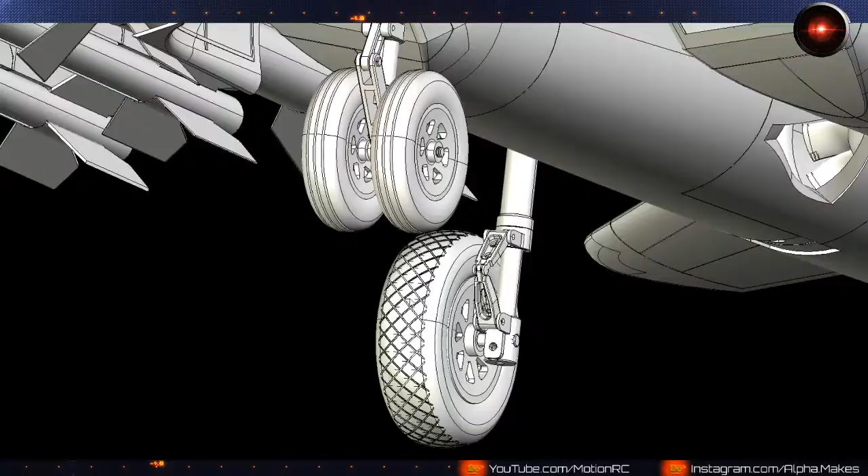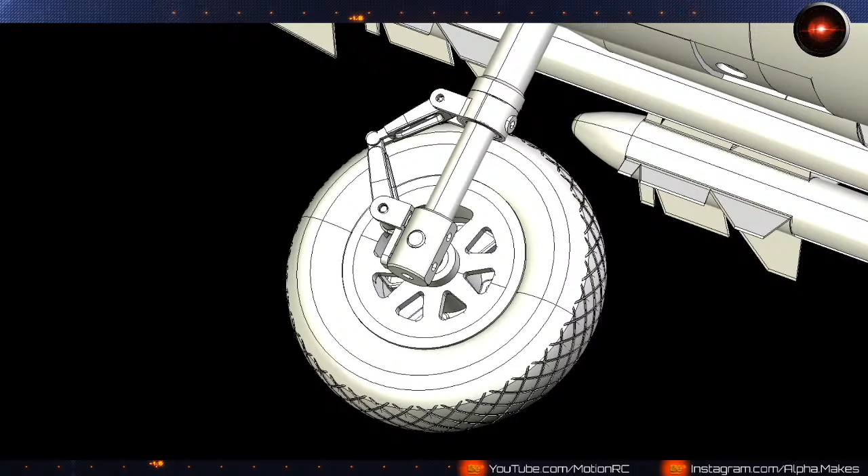So at the time, we sort of quick designed live a little component that would go onto the mains, and in this case we were talking about that MiG-29. So let me go to the MiG-29 and we'll zoom in here. And we free drew a device that's designed to clamp right onto the stock strut of the MiG-29. So we looked at clearance, making sure that this would be able to fit inside the aircraft after the undercarriage was retracted, and all of those important considerations. Trying to locate the device on the stock strut without needing to change the strut or do a lot of modification. So that's what we started out with, and I'll show you what we ended up with as of today.

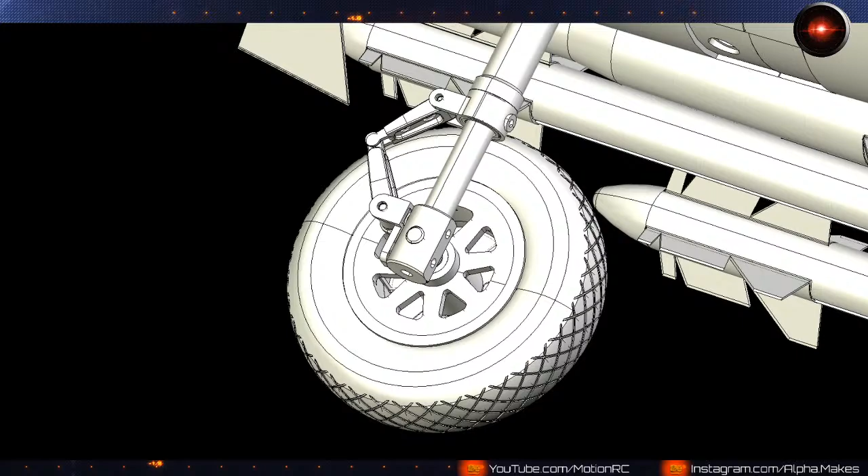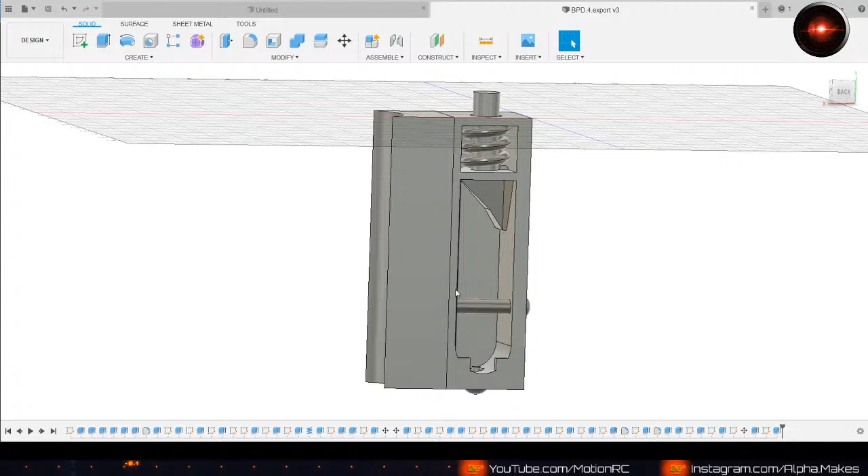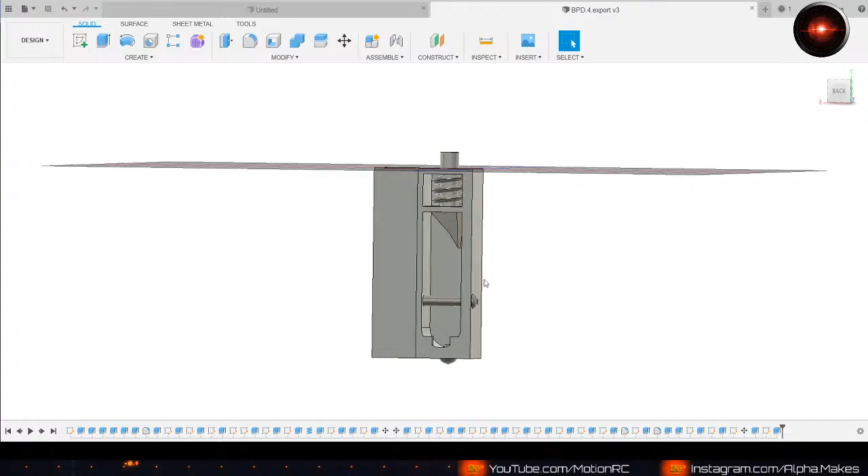Let me switch screens here. Okay, so here is now the final version. Final version is a 3D printed device. It's designed to print very simply. Got a couple little parts in it, a spring and 2 screws. And what this device does is you see this recess here that allows it to clamp over the stock strut and then secure with glue, or even we can bring a screw through and utilize the existing screws on that axle clamp. But the idea, guys, here is that we can insert into this area a pill.

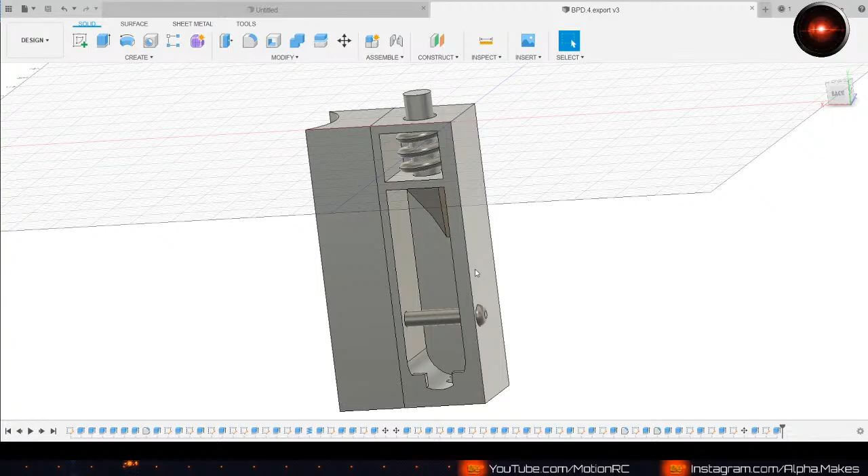It sounds funny, but we just use aspirin pills, gel caps, I should say, where inside it's a powder and the outside it's whatever type of material they use that'll disappear once you swallow it. So again, word of warning, I'm not recommending anyone go out and buy any specific medication, and read the label and all that sort of stuff.

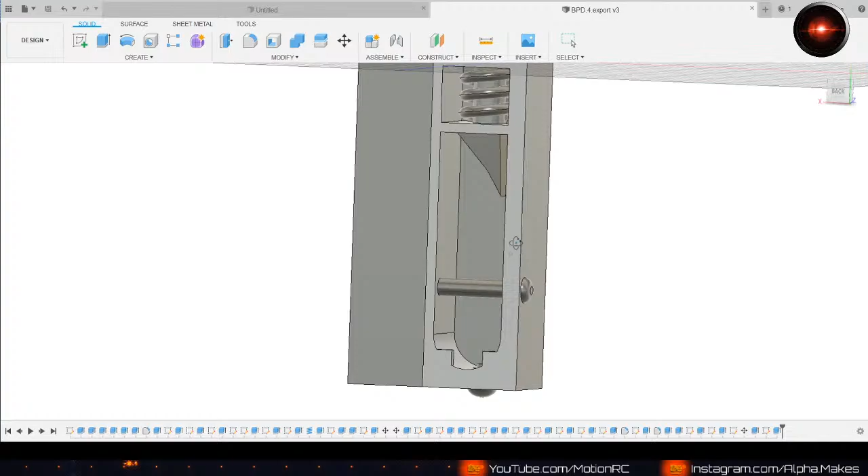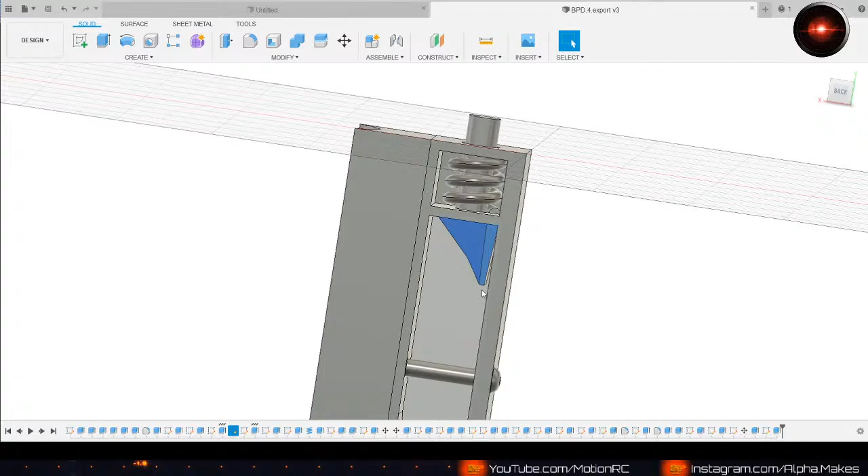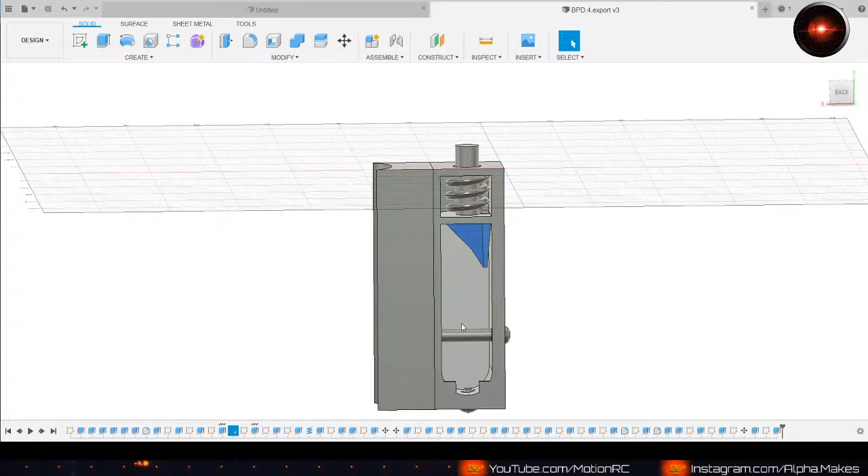But the reason why we're looking for a sort of a dry capsule is because this system is intended where you can very simply screw this onto your strut, lift what I'm calling the wedge, this guy here, push this upwards where it's in its completely sprung position, and a standard 500 milligram capsule is going to allow you to insert the capsule into this cavity here. And then when you release the wedge, it's going to sit gently on that capsule. It's not going to break it just yet, but it is sort of spring loaded. And this takes us to the firing pin, this area we see here in blue.

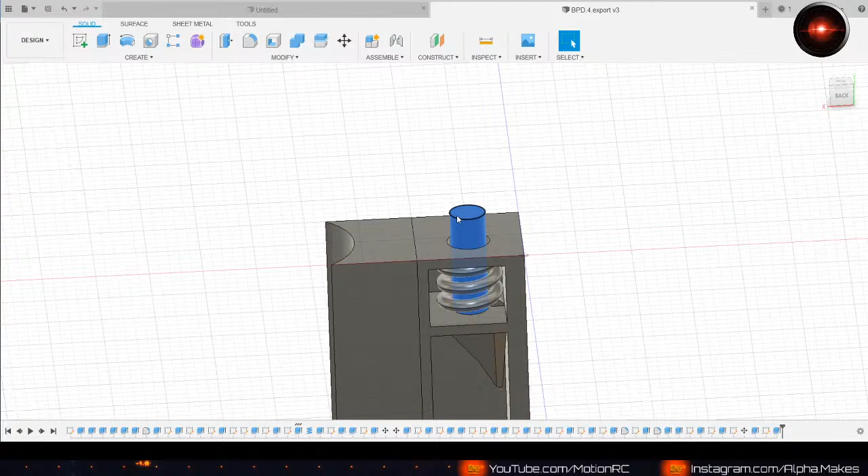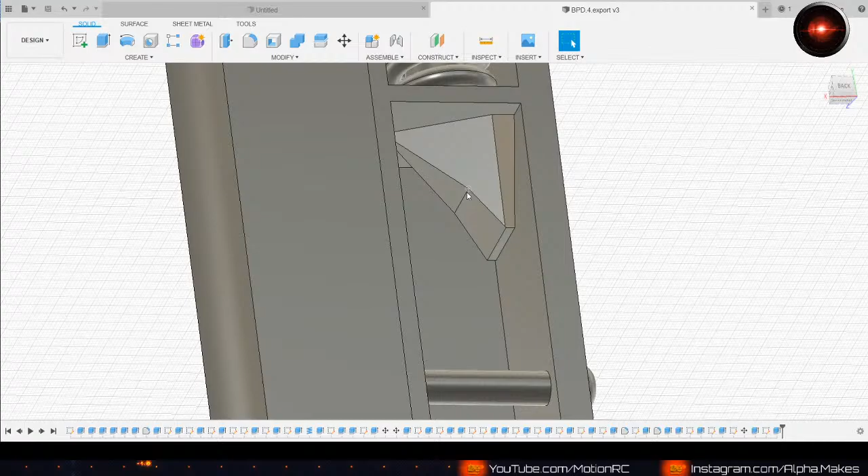And that firing pin is actuated by a separate piece that is secured to the main strut, to the part that does not compress, such that when the axle, so this part we're looking at here is connected to the axle, when that is compressed relative to the main strut, that hammer touches this pin, the pin extends down into the cavity where the capsule is sitting, and this wedge shape, initially it was a flat face, but that wasn't really enough to both break and disperse the capsule.

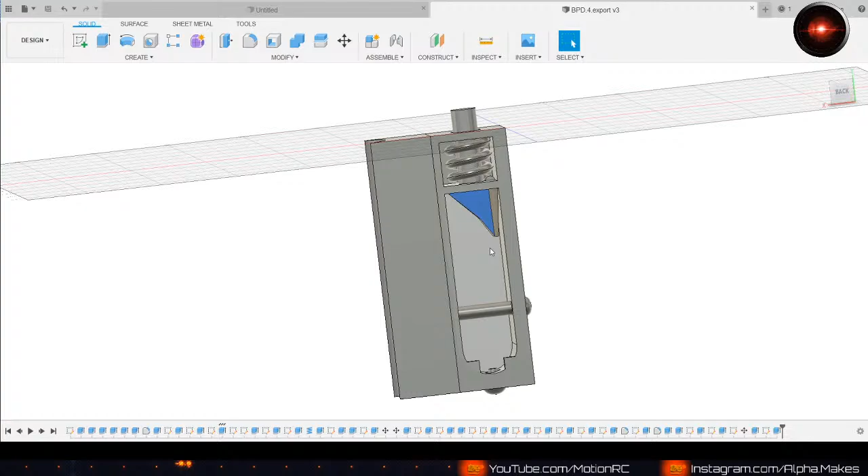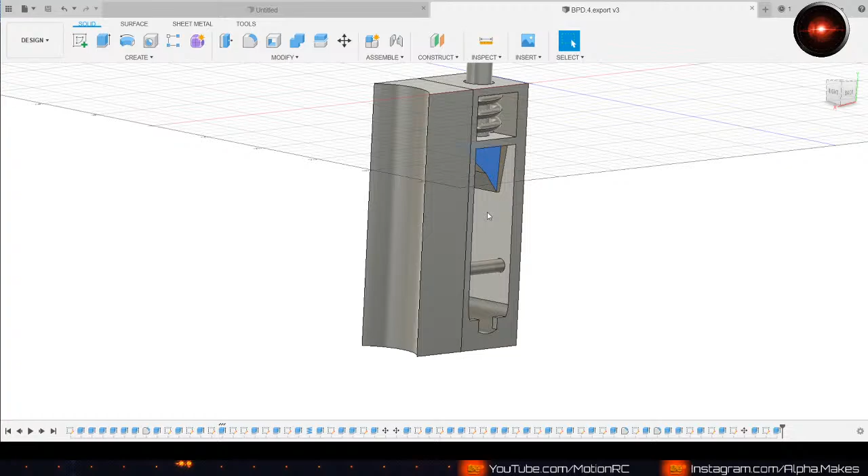But this wedge design is sort of perfect. It splits the capsule as it's moving downwards, and as it continues to move downwards, it actually basically bursts the capsule. And this entire face on the side of it is open. The reason why I use this screw here is this allows you to easily slot one in, sort of analogous to loading a shotgun shell in a shotgun. You enter at an angle and slide it right in.

And the advantage of that design is because the entire face is open, when the capsule bursts, all of that powder goes directly outwards. And as you can see, relative to the main strut line, it's designed to actually burst into the wheel. So it's designed to burst into the airstream, as it were, of that spinning wheel at the moment that it hits the runway.

The finesse in all this, as far as setup, which is why 3D printing is so convenient in being able to iterate these designs and test prototypes very quickly, is you want to make sure that it's set up such that you have enough force to compress the capsule and burst it outwards at a typical landing speed and a typical expectation of compression on the strut, but not enough force or stroke where you're going to burst the capsule upon takeoff.

So we're assuming you're taking off nice and smoothly on pavement, so that the only time that strut is really going to take a hard hit is the very first time you land. So you land, you get that nice puff of smoke or dust as you're touching down, taxi back, reload another capsule, and do it again.

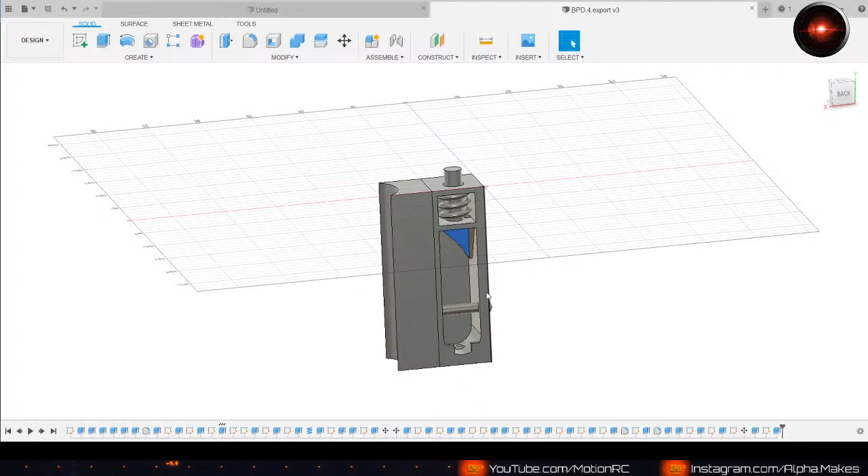The elegance of the design, which is one of the things we talked about when we first created this, was we wanted to find a way to make something that was easy to install and was cheap and light, easy to create, easy for people to go out and replicate themselves, and didn't require any electronics, any pneumatic lines, none of that sort of complexity. So that's what this ended up being.

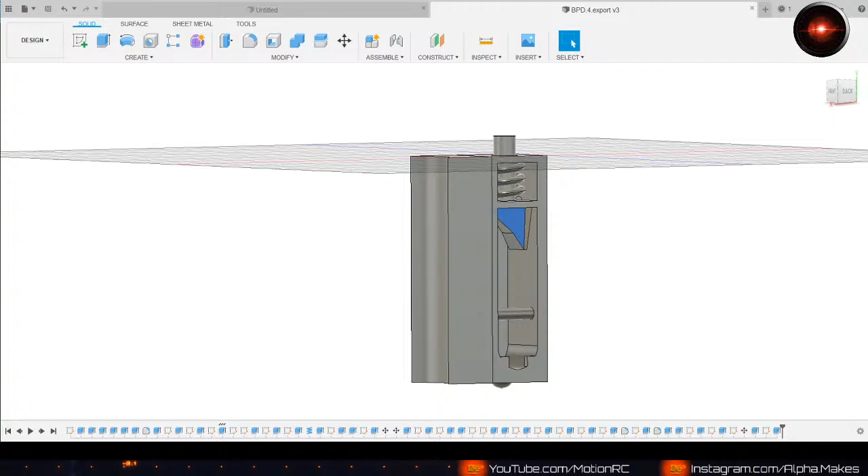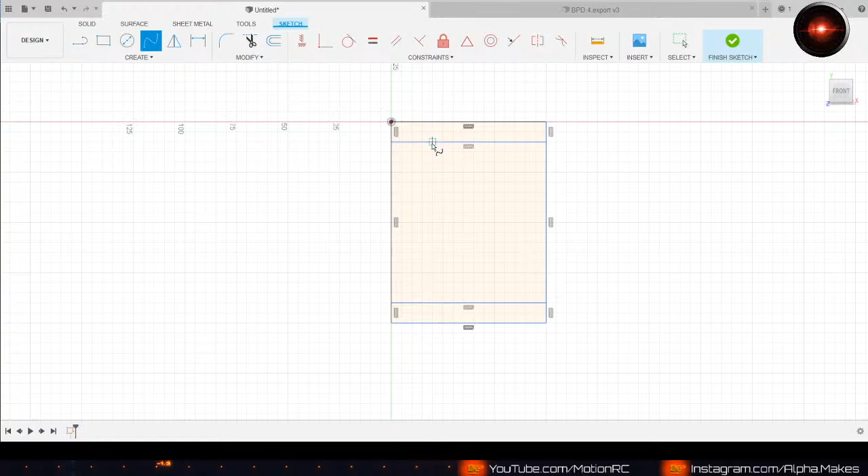Come in. We actually did this in one of the very first episodes, as I recall. But we had a request from one of the subscribers who asked if we could make a new video now that we're on YouTube. Just a very quick tutorial on how to do something like a NACA duct. So I'll show you how to do that very simply.

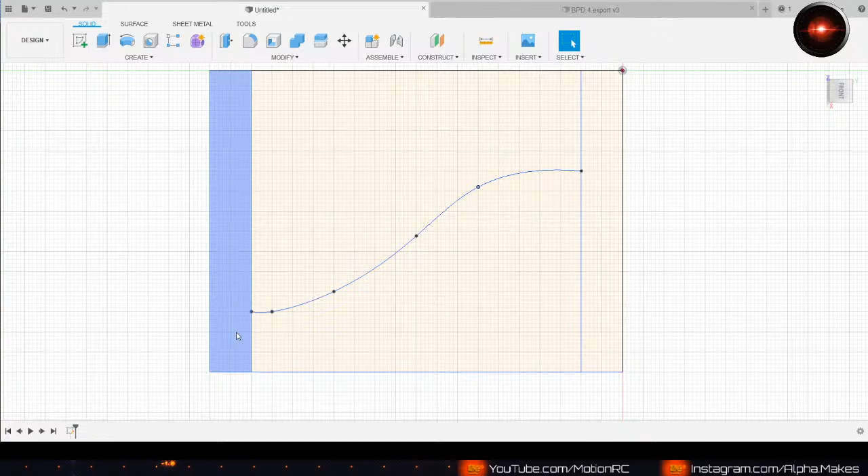For those of you not familiar, a NACA duct sort of needs no introduction. But a NACA duct is an aerodynamic duct designed by NACA, not NASA. Among other things, it's essentially intended to optimize air intake without breaking up the boundary layer. So it's essentially a low drag intake.

It's not efficient to the point where it's sufficient to fly an airplane. There have actually been real life tests of aircraft that use NACA inlets in lieu of traditional intakes, and they didn't really work out. But we see this shape very frequently for auxiliary inlets on real aircraft, and also probably most notably on F1 cars, race cars, and whatnot.

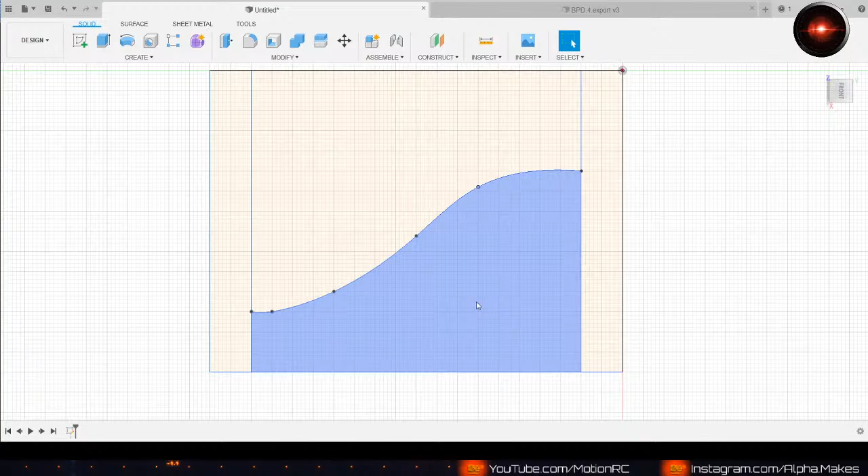So it's a very simple shape. However, it's a rather exacting shape. So I'm not going to delve too deeply into how to do that. But essentially, we have a curve, and then a taper, and then a longer throat. And in fact, while we're at it, we'll do something a bit more to scale.

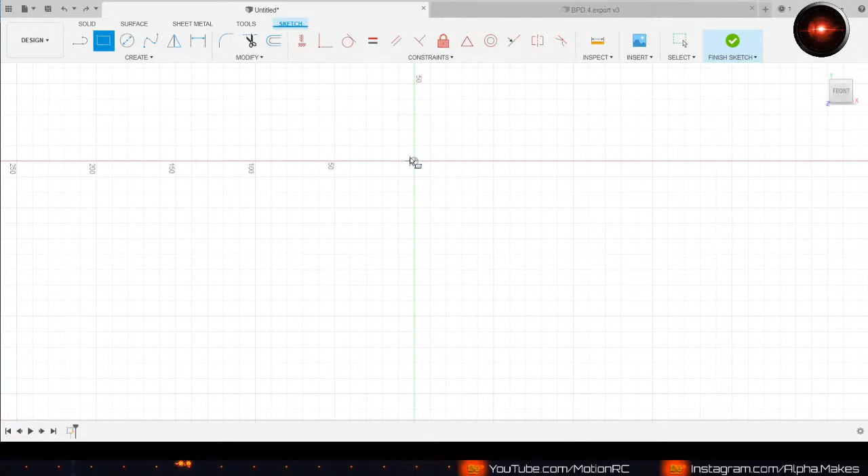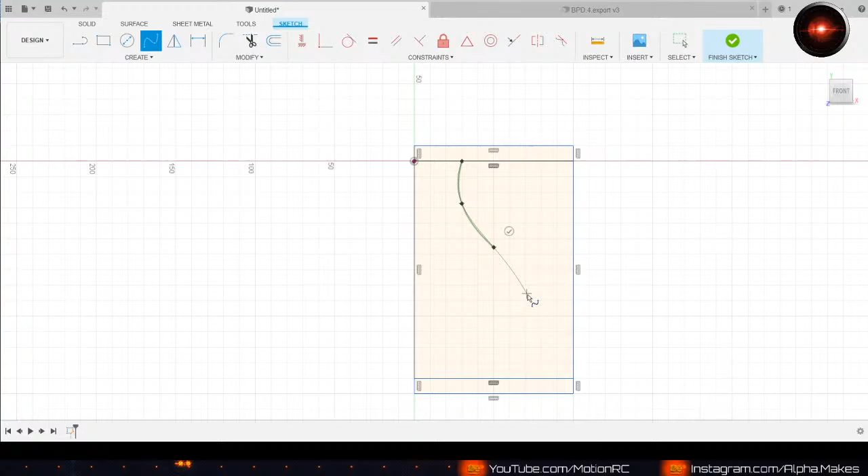Using Fusion 360, this is something that very simply we can add on at any given time. We can import a canvas, which is their fancy word for an image, and you can actually trace directly over a real NACA inlet that you find online to get a better approximation of its shape.

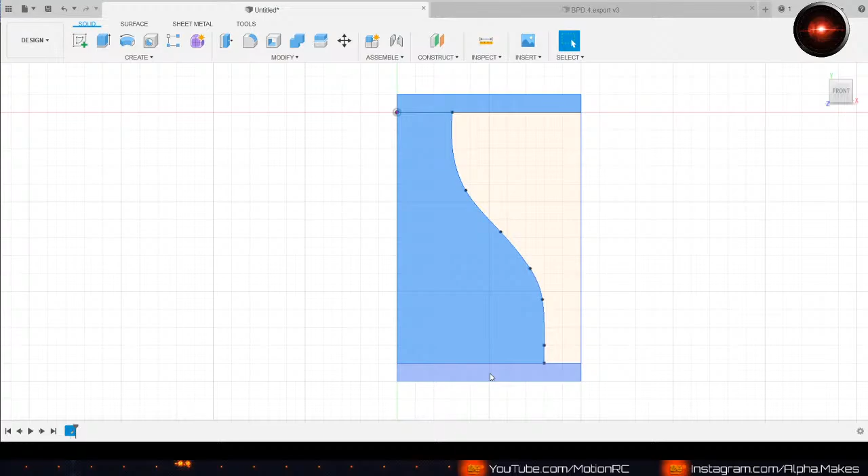On the one hand, in real life, these need to be very exacting proportions. The structures are designed as they are for a very specific reason. In RC, it helps to be efficient, but it isn't absolutely imperative, given that air molecules don't size down. So I create a half of that shape. Pretty simple. I'm going to do something else as well.

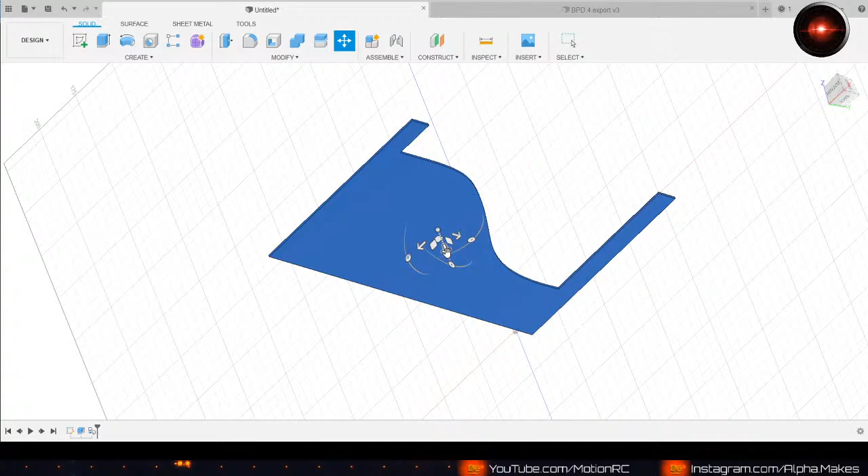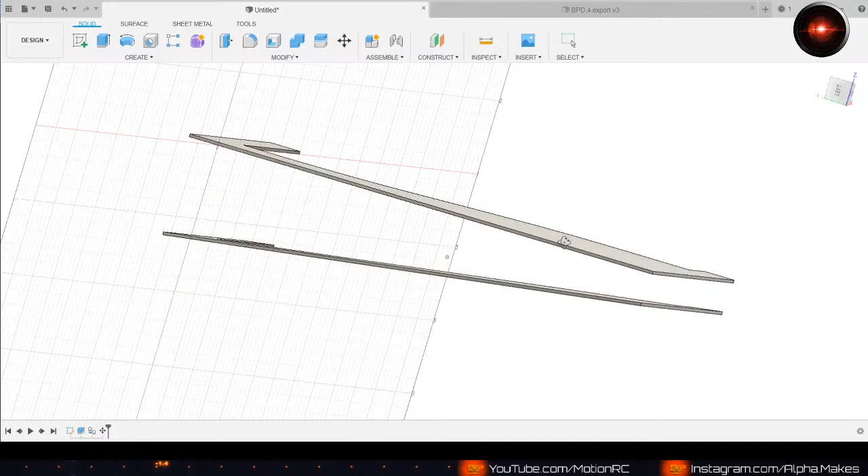I'm going to press M. I'm going to create a copy of that shape. Well, I'll show you two different ways to do it. I'll create a copy of that shape, bring that down a bit, and rotate it like so, such that when viewed from the side, there's a taper there. And we can then very quickly click the two inner surfaces and loft those together.

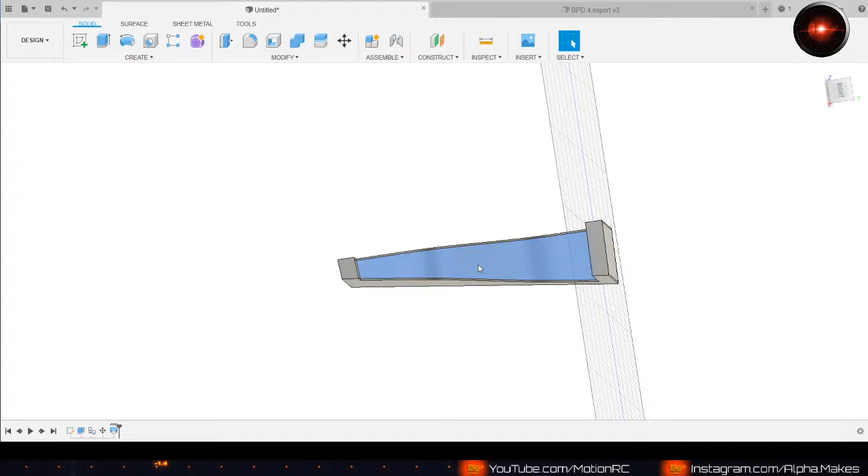Once that gives us a loft, to help you visualize, this surface is the outside. This would be the outside of the fuselage. And this surface here in blue, this is as we're coming into the fuselage or whatever housing you might have. Okay, so there's a slope. Now once we're satisfied with that overall shape, we'll go to mirror. We'll select the body. We'll select the mirror plane. And now we have that shape.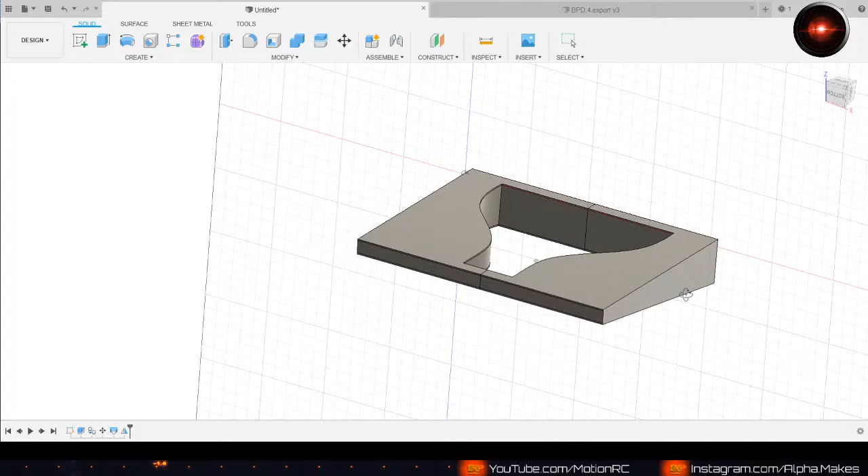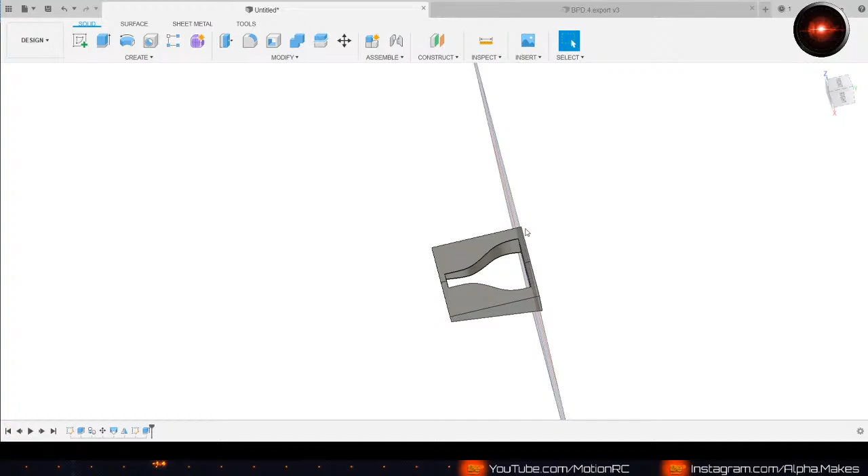Now of course, this is going to go back, so we extrude that back. We're thinking in terms of how do we make something that's easy to be 3D printed. So I'd probably leave it just like this. Probably print it flat on the bed, like so. And then once it's printed out, we would need to put a sheet underneath this bottom piece. So let me show you what that's going to look like.

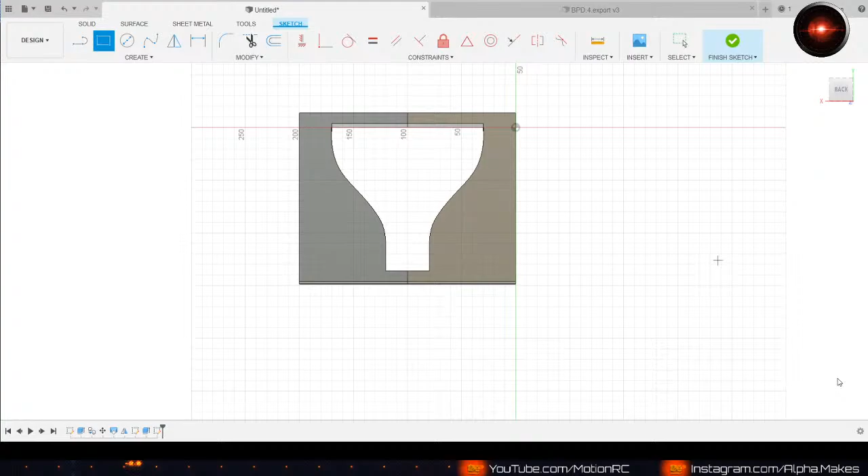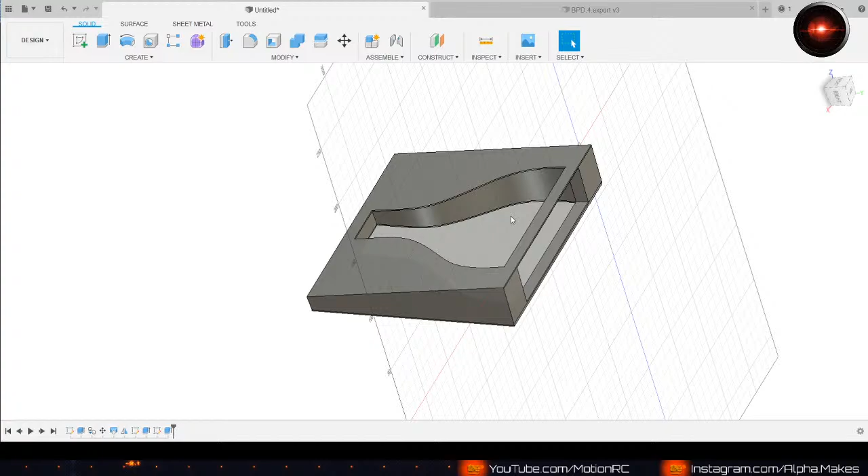We'll go corner to corner. And extrude that out again. So pretty simple, pretty straightforward. There's your NACA duct. To install this, you would cut a hole in whatever you're installing it in, and the airflow comes in here, and then enters into your plenum or your ducting or whatever else you've intended for it to go into.

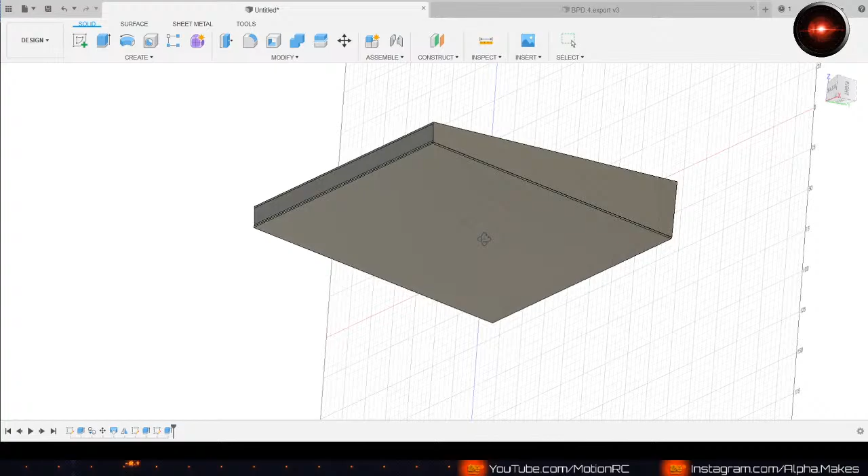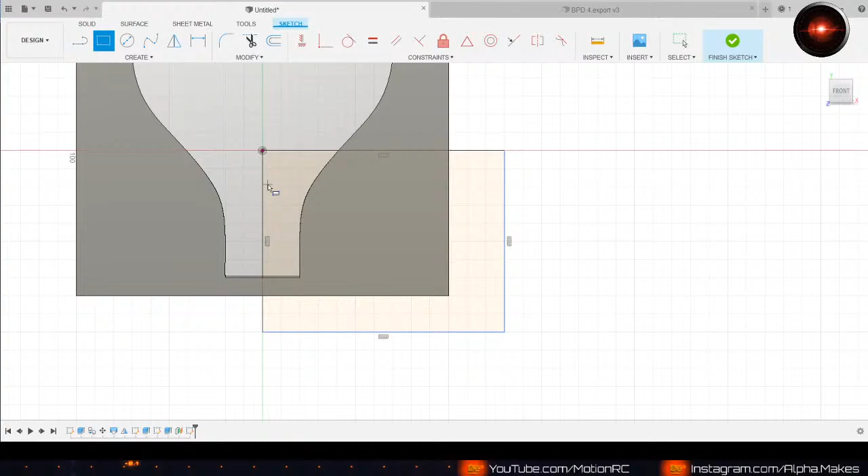If we wanted to make something that we could maybe screw in, which is nice, we can simply create an offset plane. We're going to bring that down just a bit. And now we're going to draw onto this plane. Just give you a quick example here. And we'll loosely trace those shapes.

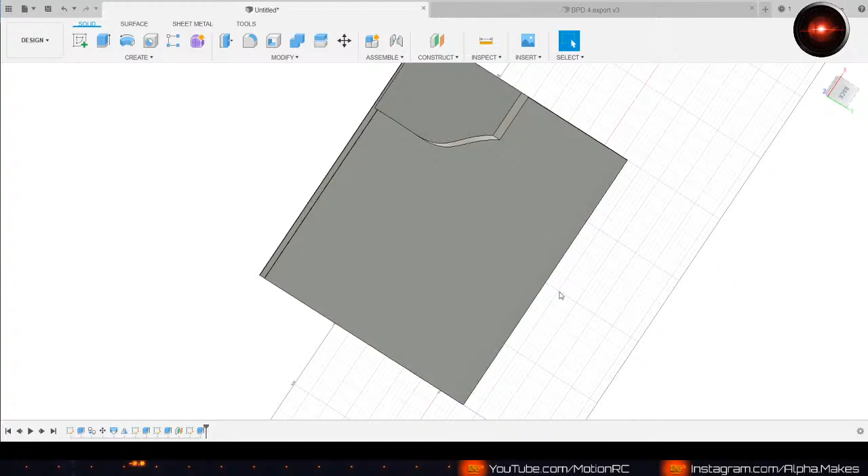And extrude that down. Click OK. Now what this does is, if we were to print this, it gives us a flat spot where we can then either print a hole for a screw or a locator pin.

Hey, Wes. Yeah, Air Guardian, I can hear you. I can hear you in Discord if and only if I turn up the YouTube volume, which basically means the way I have it set up, which I'll have to change and troubleshoot later, the Discord mic input is actually in YouTube only. So the good news is if I turn the YouTube volume on, I can hear all of us together. And YouTube, in fact, is recording all of our voices. The downside is if I turn YouTube volume up, obviously now I can hear myself twice.

Okay, hey Wes, nice to see you. We're just getting a test recorded, just a test here, but with our setup we don't hear ourselves.

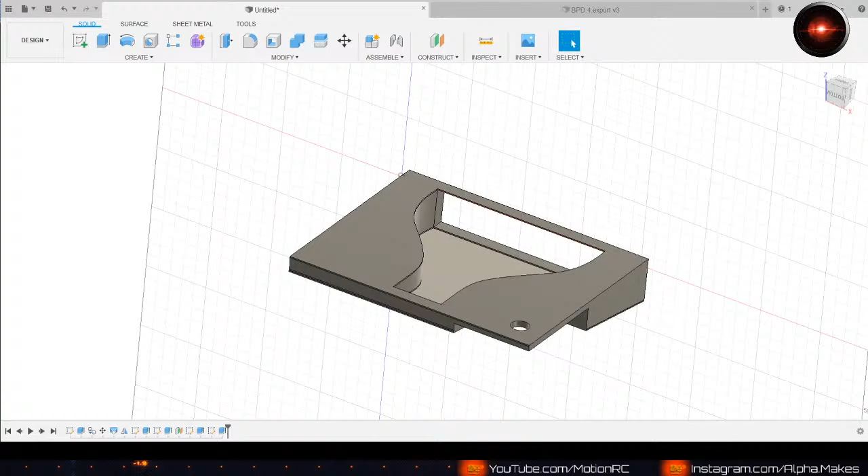So that, guys, is a very simple way to create a NACA inlet. Okay.

Yeah, there's a delay. There's a delay, Air Guardian.

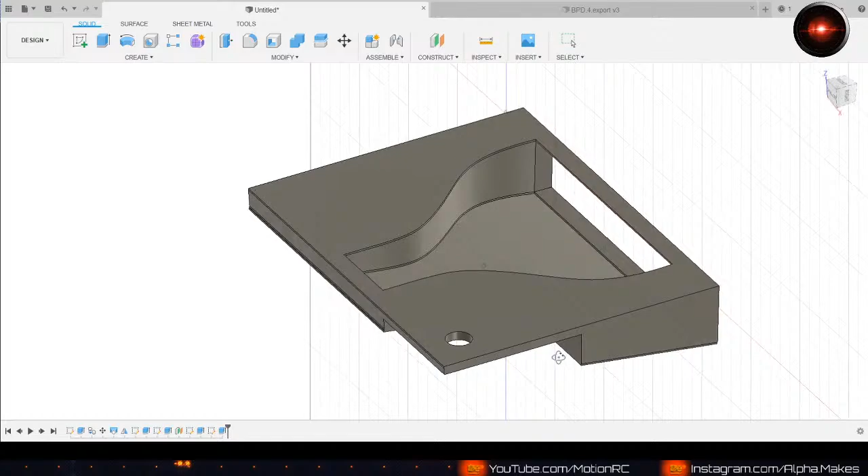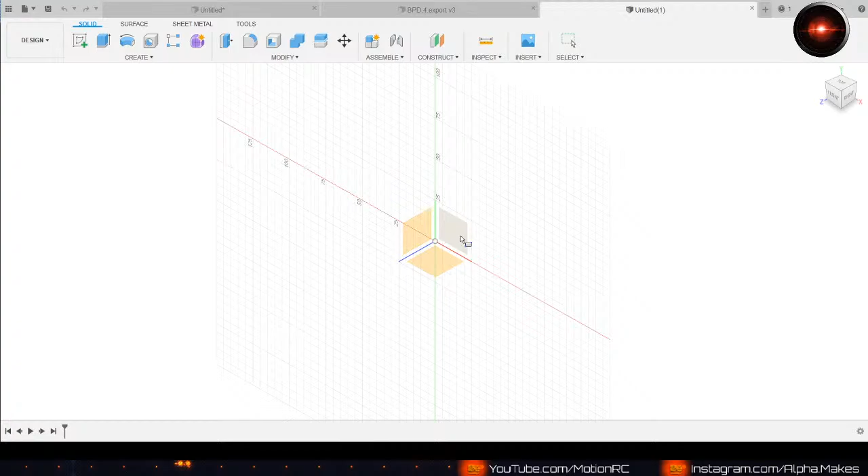Now, so that's one way to do it. The one disadvantage of that simple way is the slope. Slope is a straight line. On a real NACA, it actually has a curve to it. So I'll show you how to very quickly, simply make one of those. We'll actually just jump from the top. These are so simple to draw, we can just start again from the beginning.

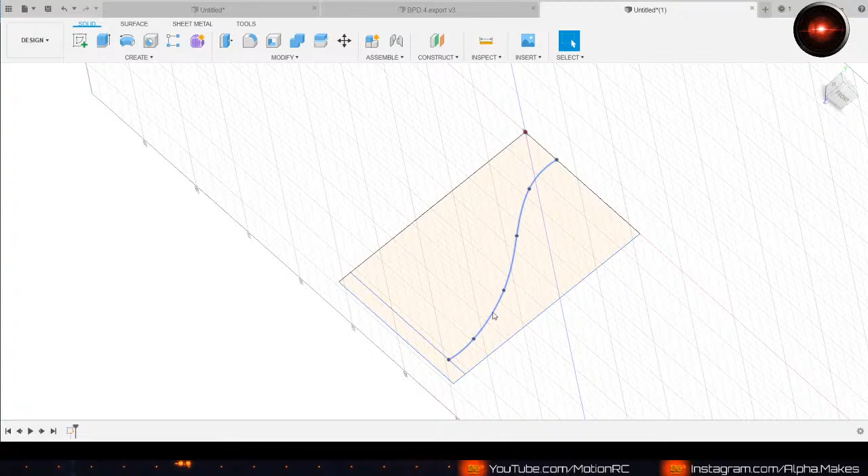So clicking the spline, creating my shape, making a couple of adjustments here. Okay, so this is our general shape for the outer face of the NACA.

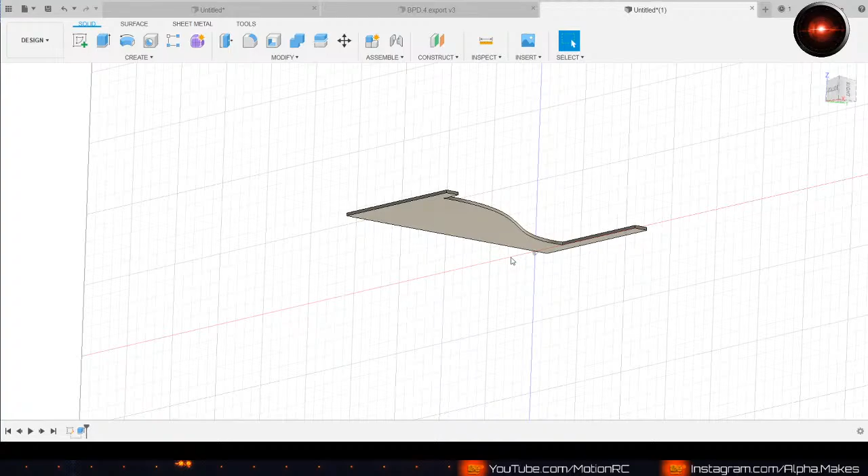Now, rather than duplicating this and setting one at an angle, we're just going to, how do we make slot car track parts? Easy. Easy, Wes.

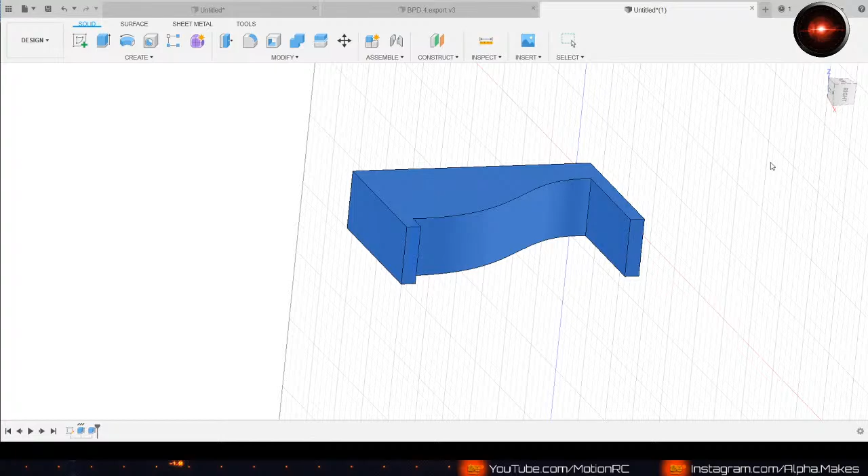So let's go ahead and split that. And while we're at it, we select our body. This is the body we want to mirror. We select our plane. This is the plane. We click OK, and there we go. Now, to do that slope, we locate the side. Click on the side. Press R.

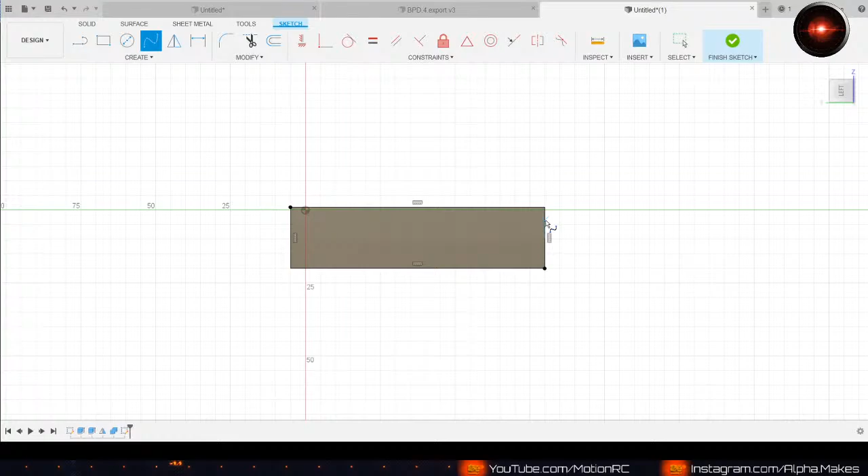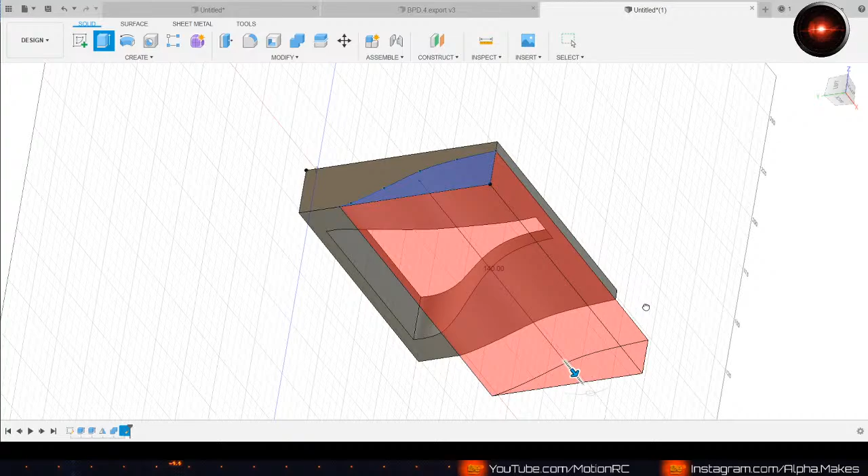And now we'll redraw that slope. Now this is where you're going to look at your reference drawings. And the slope is also a very important sort of element. I'm going to eyeball this. It's going to look something like that. We're going to take this shape. And then pull that across.

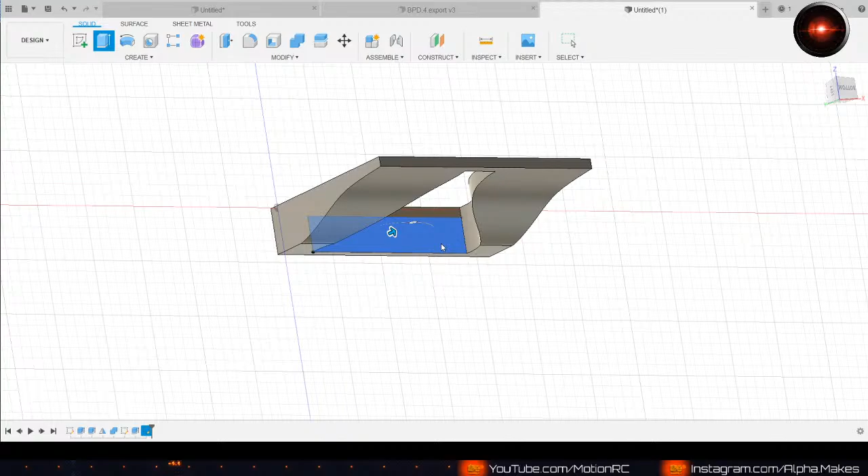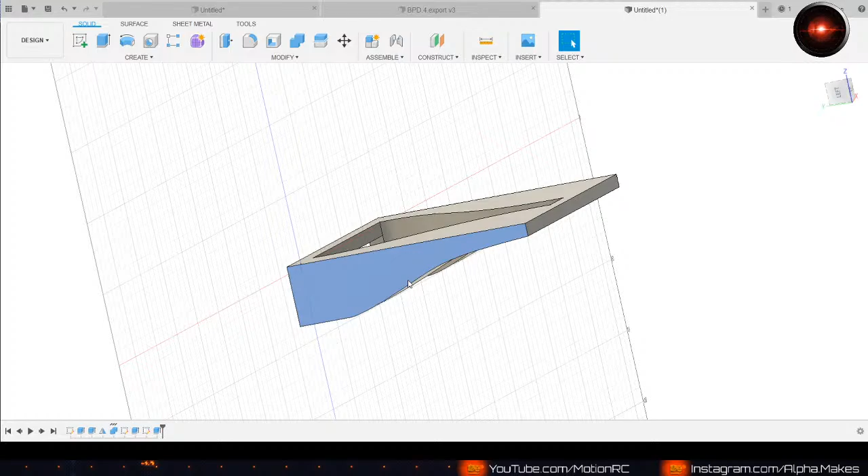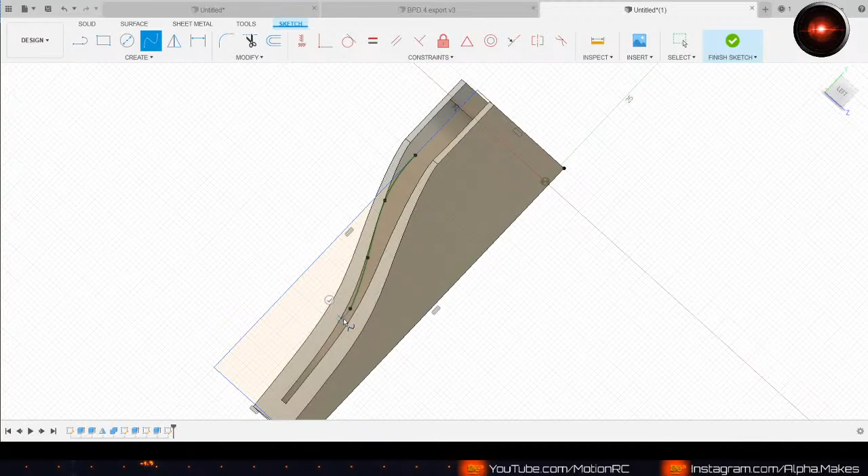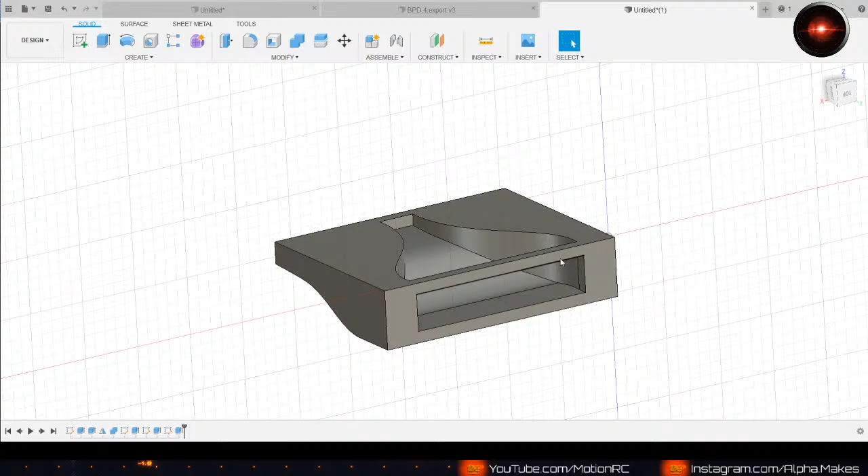But just to show you what that's going to look like in final, I'll sketch out a surface here. Something like that-ish. And we'll bring this across. Sheet the entire thing. So what this gives you, again, it takes a minute to make, and once you make a couple of these and learn the scale of your aircraft and get a feel for the shape and the size and the depth and the overall profile of a NACA that is effective for your use case, you just save that and print them and put them in wherever you want.

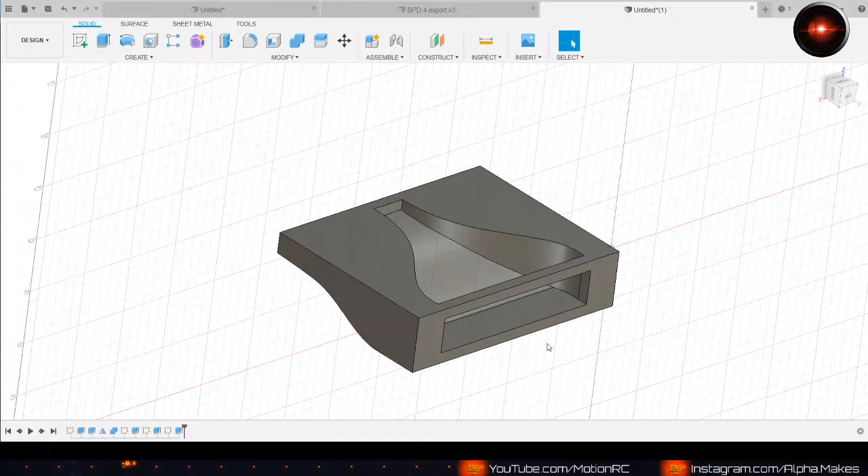Now, I will say that from an aerodynamicist's point of view, you can't just bring air in, right? You need an exit. So as important as it is to plan where you're ingesting air, you always want to take stock of the volume of air being brought in and find a way for that air to leave the fuselage or leave whatever structure you're bringing air in. Otherwise, it's just going to collect and spin and not do any real good. Airflow is what actually cools and does work. Bringing air in alone is not airflow.

Okay, so I think we've checked that box. So again, thank you to the gentleman who requested that, who is a subscriber and sent me that PM asking to see how this could be done, and maybe a quick and elegant way to draw those out. And I hope that that makes sense.

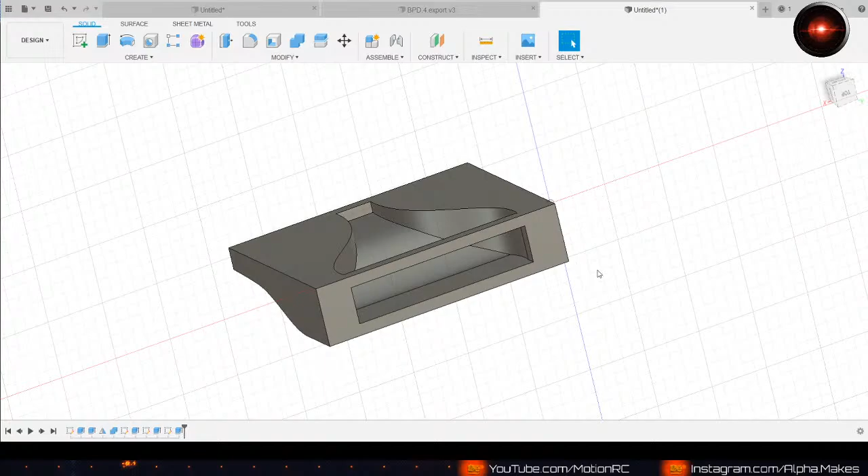Okay, let's try something else. Now I'm going to take a pause here, guys. We have just 5 people on, so this is good. It's just a small audience. Probably we have a lot of people who are busy. So before next week, let's take a couple minutes now and try and figure out this sound input and output thing. Okay, JD, I'm going to be using you since I have your mic showing in Discord as live. The others are muted. Can you do another sound test for me, please? Can you do it?

Absolutely. Let me know what you need. Just when you hear this, say okay. Okay. I see your light lit, but no sound there, Alpha. Okay, JD. So in Discord, it seems like there's only like a 3-second delay. Can you talk normally? Yeah. Yep. I'm looking forward to it. Yeah, you see my light lit still with no sound, looking at this control tower. The sound comes about 5 or 6 seconds later. Okay, I'm with you. Got to travel halfway around the world to get to me, so that's understandable.

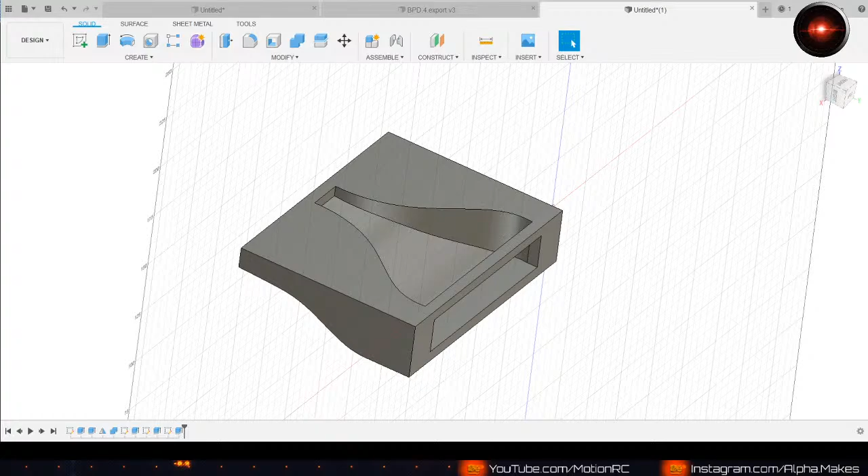Okay. And you need to get my slot cars. Yeah, so now, Wes, now you're a slot car guy. Tell me about this. What got you into slot car racing? I've thought about it for a long time, and then a couple of my friends, we decided to start a guys' night where all the wives go out and all the guys stay in, and we wanted something to do. So let's get a slot car track. And you know me, go big or go home. So I bought the most